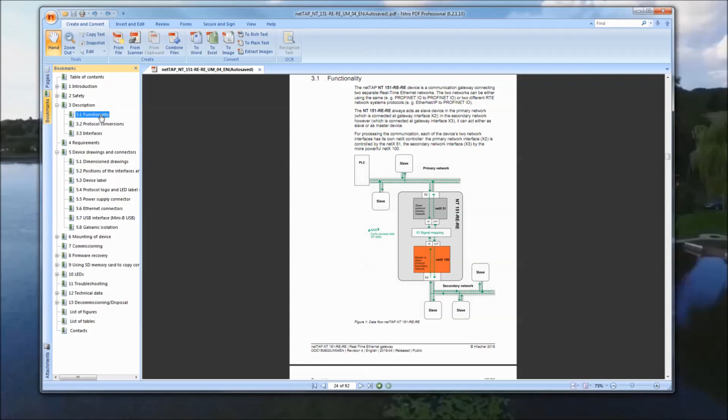So inside the device here, we're looking at the functionality provided by a couple of proprietary chips that Hilscher makes. The first on the X2 side, which is capable of slave protocols, is the NetX51. Basically, that side can be configured in any one of those networks that we looked at as a slave device. So in this case, we're showing the PLC talking to multiple slaves, including the Net Tap device. On the other side, the X3 has a NetX100 chip, and that is capable of doing slave protocols or even master protocols for several of the ones listed on the other page there.

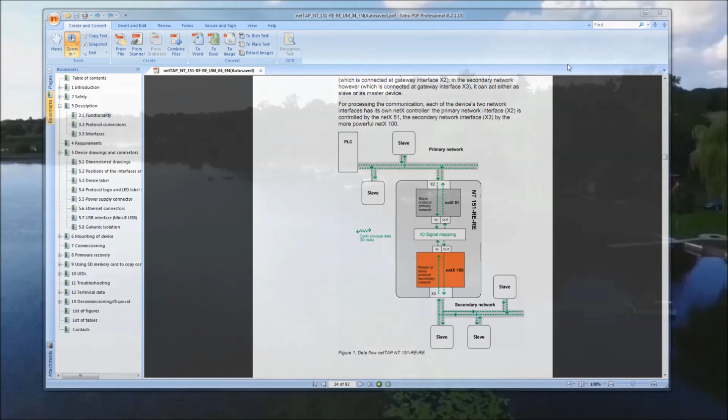In essence, that's the device that we're going to use, and we're going to link together a 1511 Siemens PLC. We're going to go Profinet over to the X2 port. That'll be a Profinet device. The Net Tap device itself is programmed with a USB port here in front, and the Ethernet IP side is going to be talking to this CompactLogix, and that will be configured as an Ethernet IP adapter here and a scanner on the PLC side.

So we'll break this video into kind of 3 parts. First, we'll go through the configuration here on the Net Tap. Part 2, we'll go through all of the configuration to set up the Profinet network with a device. Then part 3 will be taking a look at getting that data from the Siemens PLC and taking a look at it in the producer-consumer world of the Ethernet IP. So we'll get data flowing from the Siemens PLC to the CompactLogix, and then we'll have data flowing in the reverse direction for the Siemens PLC.

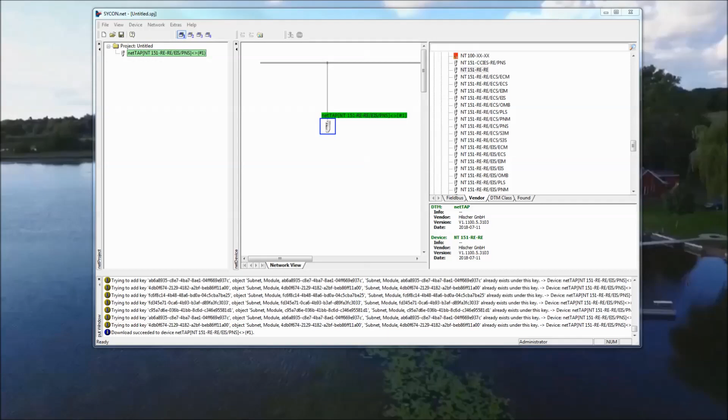So that's the last thing we should need from SYCON.net, and we're going to move over to my virtual machine that has a blank project started for the Siemens side. I'm not going to go through every point step by step. I'm not going to teach you how to program the portal, but I will go through each step as needed here. This is a completely blank project. So the first step is to add my PLC, and I will do that from controllers. It's a 1500 CPU. It's a 1511.

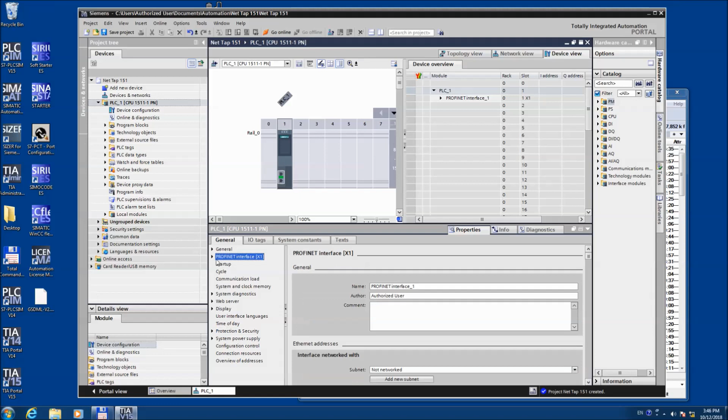And I happen to know it's that part number, and it actually called up a firmware and everything. That will actually start a project which will give me access to a device configuration and ultimately the network configuration. So I'll start here with the PLC itself, and I will define the IP address that we talked about from our network diagram. We'll move this PLC onto the 2.1 address.

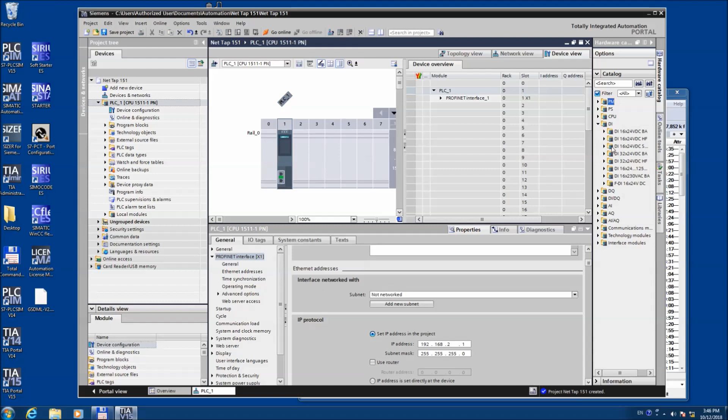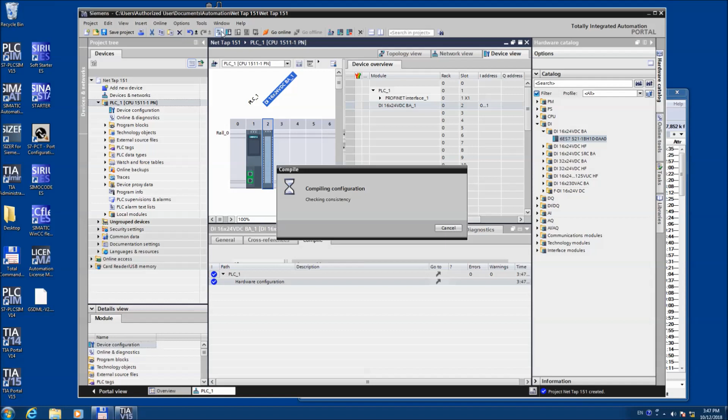There happens to be a digital input card. I need to put that in just so everybody's happy. As I download this configuration, we aren't actually going to be using this card, but this is all that's really needed. I can compile that, check it out. No actual errors.

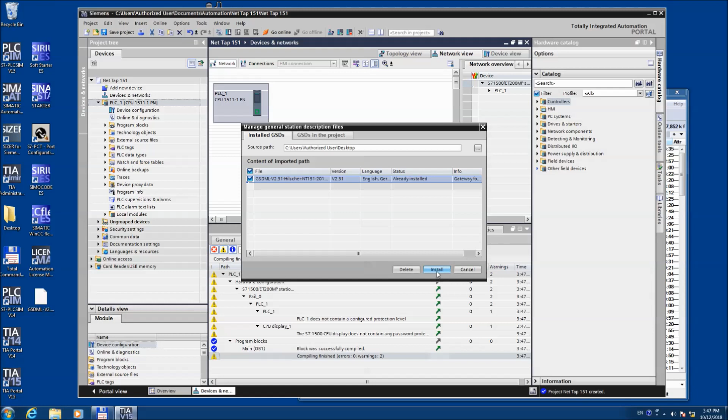The next thing we'll do is configure the network, and in order to add that station, it's not going to be here in your catalog unless we import that GSDML that we just exported. So if I go to manage GSDMLs, I have the GSDML on my desktop here, and I have this pointing to my desktop, and I can highlight that and click install. That will give me access to the Hilscher NetTAP 151 GSD file. This is a generalized GSD file, meaning if I decide to change my number of bytes transferred later, I don't have to go export and re-import and all that.

I should be able to find this under other field devices, the one that we just imported, and additional field devices, Profinet IO. Okay, it looks like I don't know where I'm going to find this. Gateway, there we go. It's under other field devices, Profinet IO, Gateway, Hilscher NetTAP 151, and there it is.

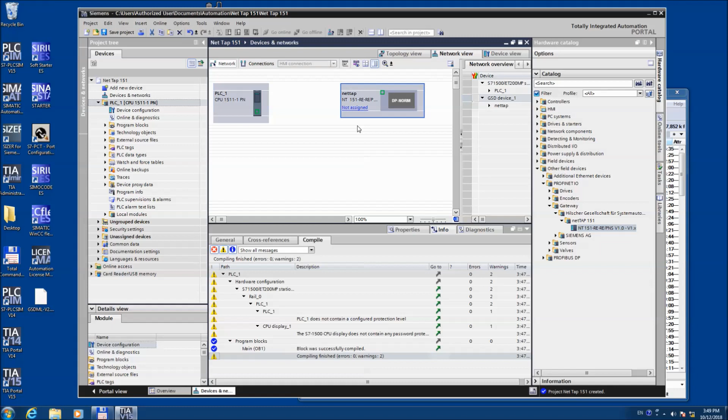At this point, I can just drag that right onto my network, and you can see that it's already named, the name of it's already NetTAP. It is not connected or assigned to any controller. So if I click on not assigned, I have the option to assign it to the controller, which sets up this correct network path for the control.

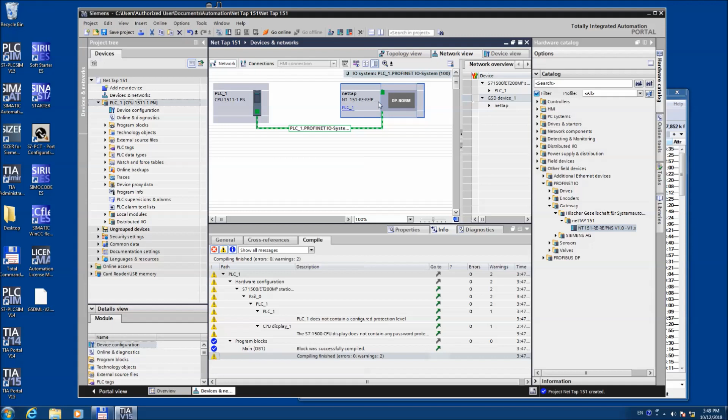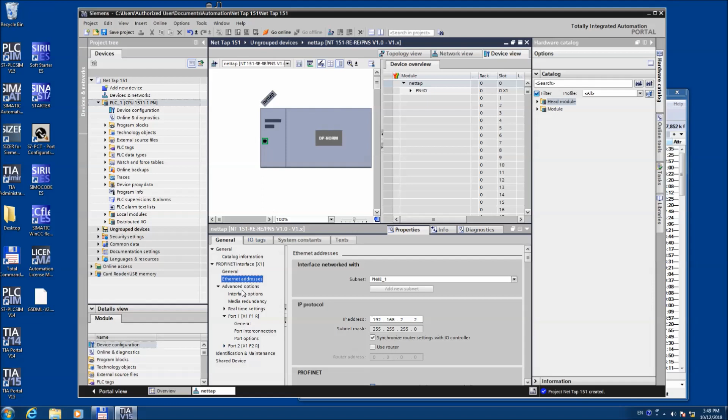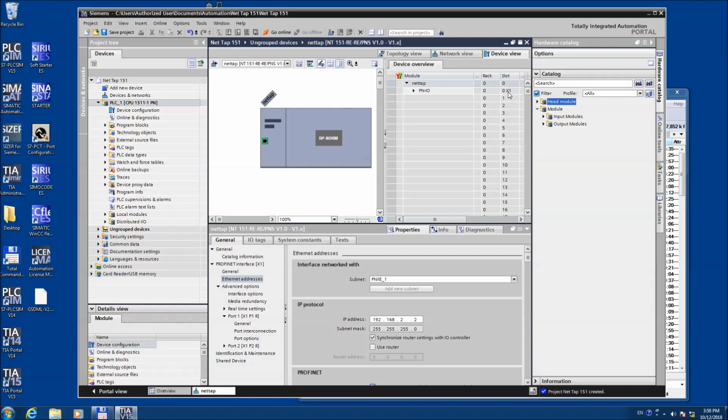Next, I'm in the device config for the NetTAP. It shows up here as a DP-NORM device, but it is our NetTAP 151, and there's several ways to get there, but basically what we've done is flipped over here to the device view of that. Over here in the catalog, I can now insert telegrams. As you remember, when we made it, we inserted 2 telegrams for this. We had slot 1 was 12 bytes of input, and all I do is drag this over.

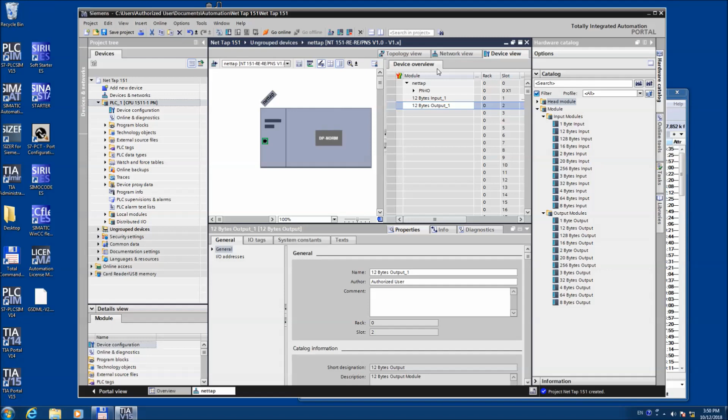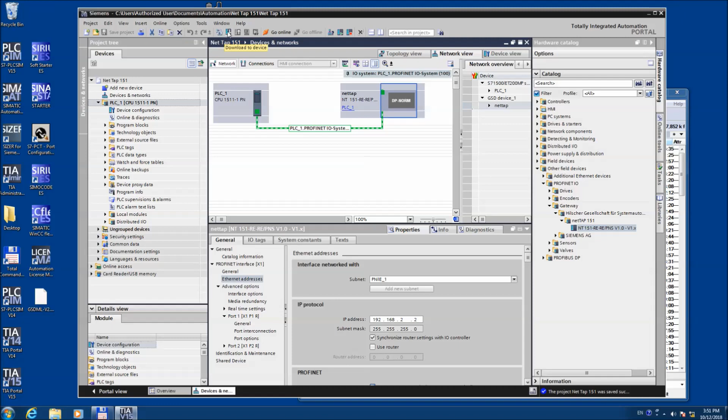Then I can grab 12 bytes of output for slot 2, and now that should match perfectly with what we set up in the NetTAP. If I go back to the network view, we have a device name, NetTAP, and we have the same telegrams defined. I can save this project, download it to our device.

First we search for the device. Okay, it found a suitable target device, and then we load that. I'm downloading the hardware configuration and the software. It had a project in it previously, so I'm just telling it to go ahead and load. As I finish here, it's going to go ahead and start the PLC running. If I go online, right here, it should show us the status. That's good news. We've got a network configured, and we have green check marks in that network.

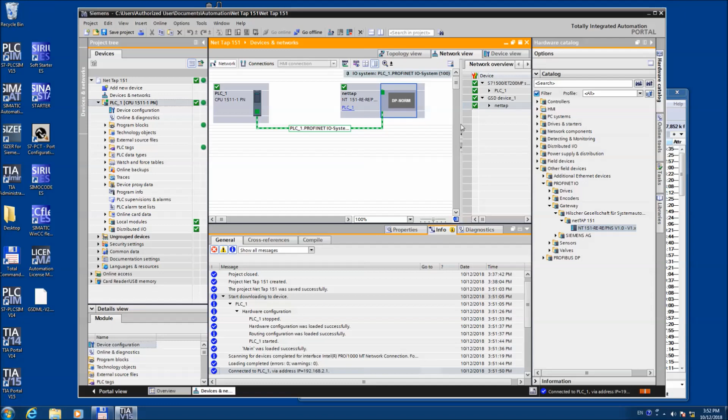Next thing we can do, we can check the device configuration, and we can learn the addressing scheme for that device. I actually don't like that. I'd like them all to be the same for the input words and the output words. So I'll have to go offline and configure those addresses to be the same on the input and the output. That'll just make things a little less confusing. I'll save the project, download, and that will readdress that data.

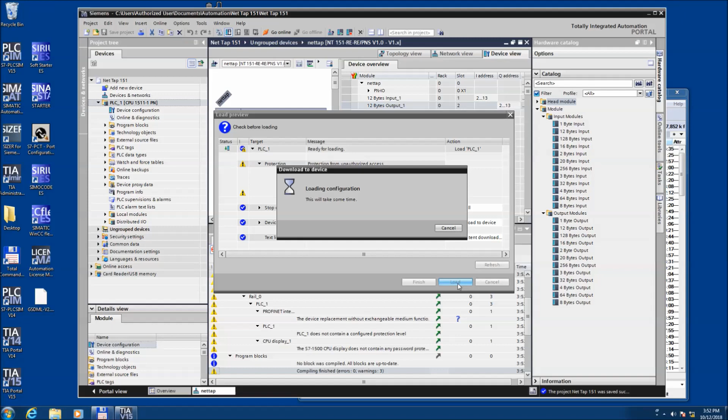Lastly, in the next steps, we're going to want a way to view that data. And the simplest way with Siemens is to set up just a watch table. Watch and force tables, I'll add a new. Here in the watch table, we are going to map the 12 bytes in and 12 bytes out that were defined over on the NetTAP. And we can do that simply.

Just as a reminder, we're going to go back here. I kind of changed courses a little bit. I mapped in this telegram here at 0. That is the input bytes.

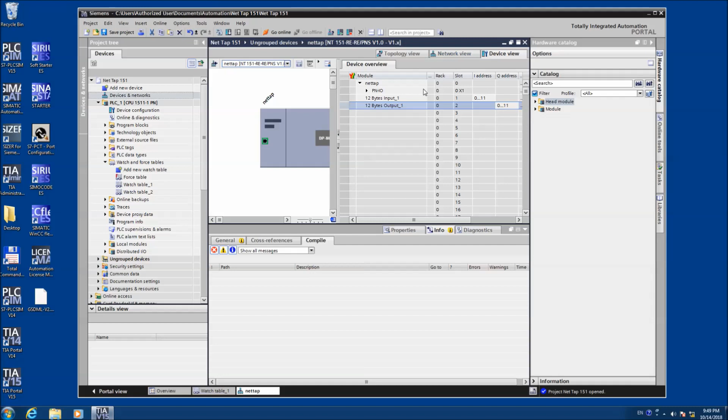And also this one at 0. We have 12 bytes as defined from 0 to 11 as I/O in the Siemens PLC. So going back to the watch table, we're going to just define those as bytes. We're starting with input byte 0. We use a feature here, it's kind of like an Excel spreadsheet. I can go ahead and add 11 more rows, and that will bring out all of the bytes from our input that's coming from the Net Tap.

Our output bytes, QB 0, those will be defined here, and I'll bring out 11 more rows, and that's all of our output bytes, meaning from the Siemens out to the Net Tap. I'm going to choose to display these all as decimal. So I'll go ahead and mark all of those as decimal. That means that it'll show me in counting numbers rather than hexadecimal format the value of each number.

Later on in another video, I plan to take these 12 bytes and then break them up into different data types, words, which would be integers, 16-bit integers. If we take 4 of these bytes, we can either make a double integer or a real data type. There's some complexities in transferring those other data types when you're talking about the big endian byte order in the Siemens side, as translated to the little endian byte order in a Rockwell PLC. So I decided to break that off into another video.

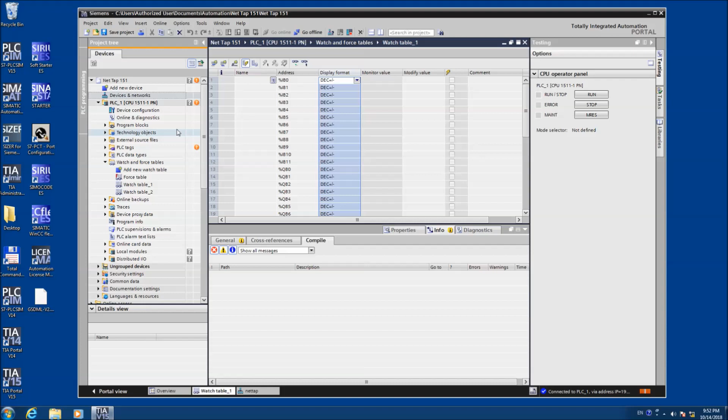So we hit the glasses here and we can see that all the data coming in is 0 and all the data going out is 0. We've got a nice tool here. If we decide we want to send a 1 over to the ControlLogix, all we need to do is put a 1 there and hit this lightning bolt, and that will actually put a 1 in the first byte of the telegram.

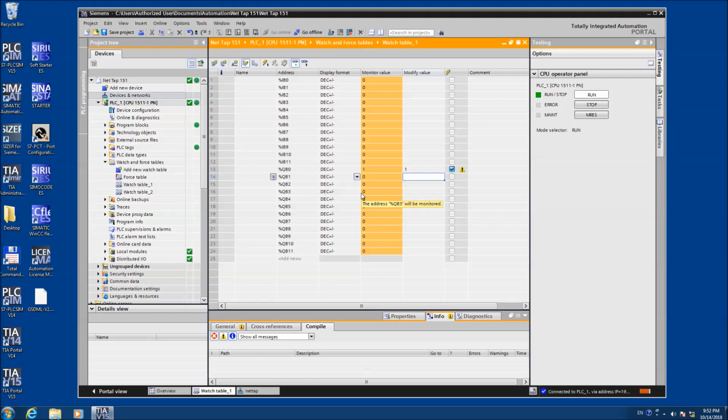Okay, now for the part that I was kind of dreading. I am going to try to search back in the memory banks and come up with a basic configuration here for the ControlLogix PLC. So I started this new project. It's a Net Tap demo, and all that I did was call out this 5370 controller, which is CompactLogix. Here's the part number for that. It's a simple shoebox PLC. When I say that, I mean a PLC that has built-in I/O.

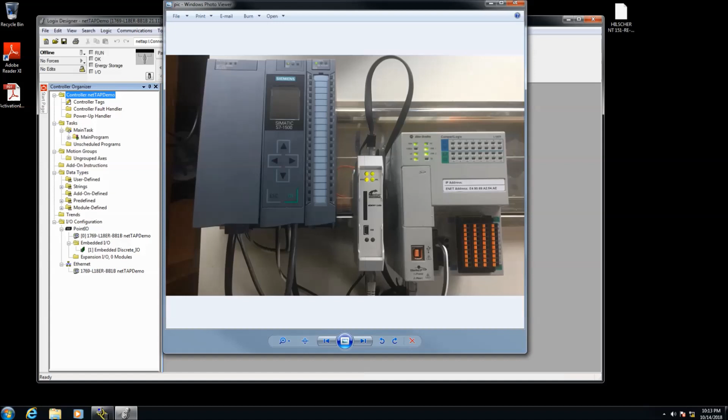Just for quick reference, this is the actual setup that I'm programming. The Net Tap in the middle here, minus the USB cable that I had connected to it for programming it. The 1511 PLC from Siemens, and the project. This is a CompactLogix that I just started the project for. Let's go ahead and try to get data flowing through the Net Tap here. This should be the last step in making that happen.